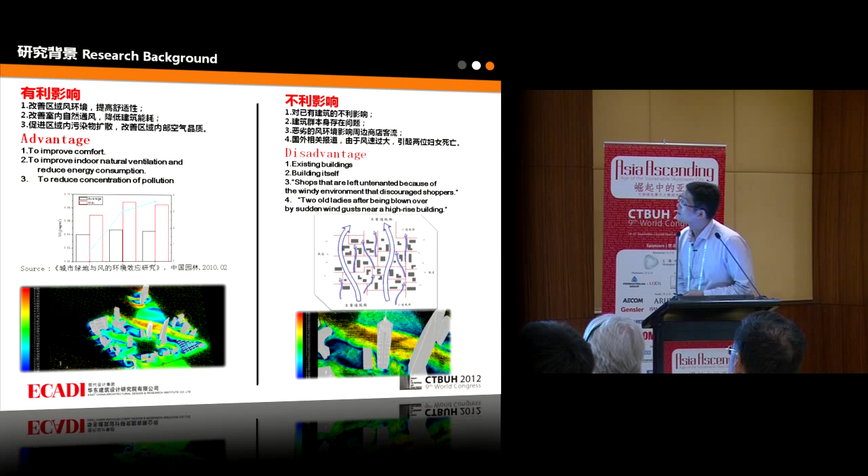So would it be in coordination or in harmony with the other buildings? In line with the literature, sometimes it will also affect the flow of neighboring shops, sometimes causing a decrease in visitor flow, and sometimes we also had casualties because of high velocity winds. So we hope that we can do some research.

I cited them from the internet. First, we have two methodologies: numerical simulation, and wind tunnel testing.

A couple of days ago, I also attended a workshop on the wind tunnel, because this is research based on the structure. If we use this wind tunnel method, it is quite expensive. But for numerical simulation, it also has some problems, like the reliability of the results. So it is kind of a contradiction.

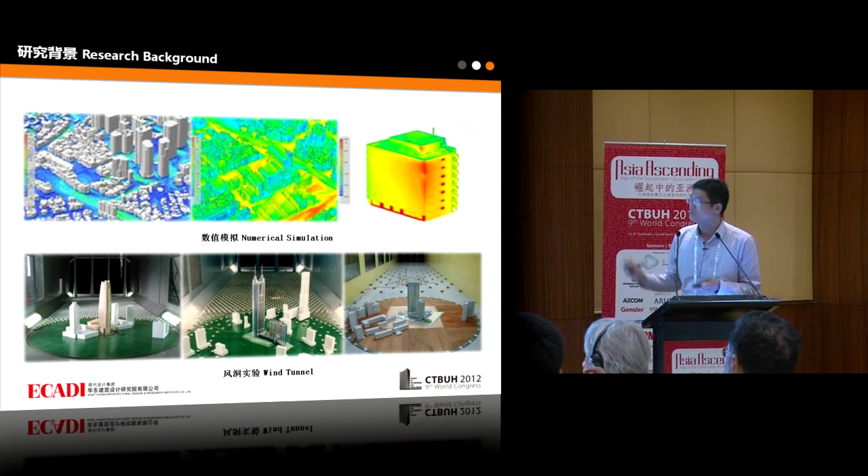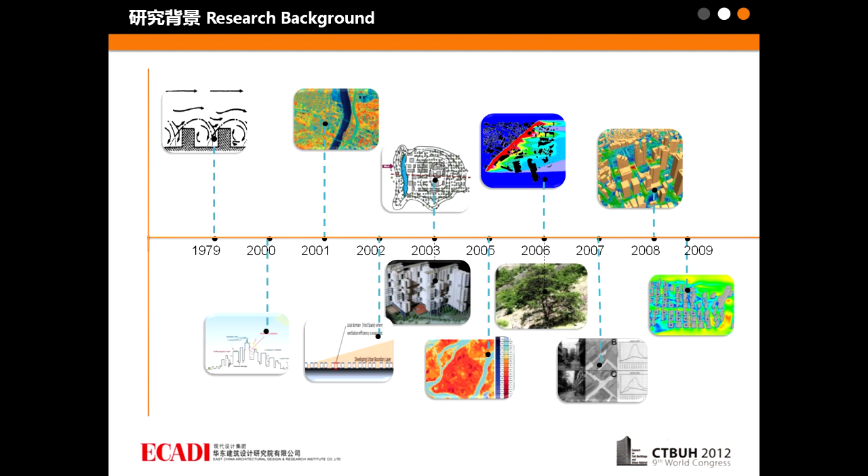Let's look at this slide. In recent years, ever since numerical simulation started from 1979, at that time computers were not quite mature. They have calculations based on mesh or grids. They were doing research based on one single building.

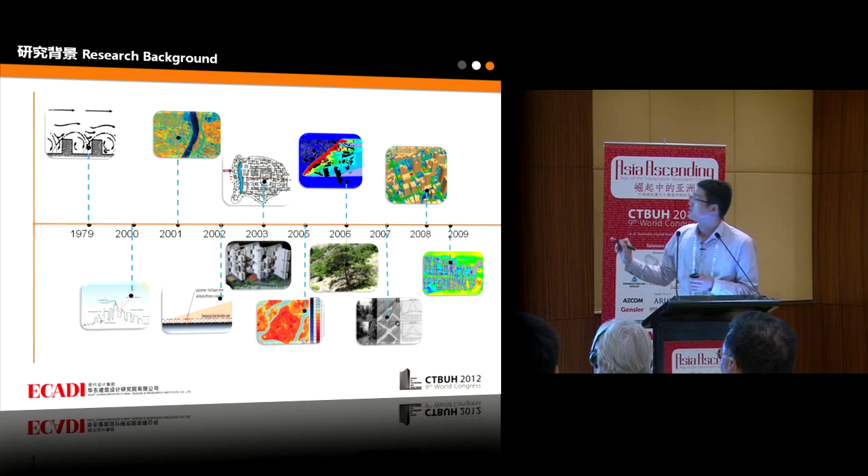So with urban sprawl and urban planning and requirements for comfort, we now have large-sized or middle-sized simulation. This is the development.

Secondly, I will talk about the basic theory. It's kind of a lengthy part, because in our research we found that for those larger-sized simulations, we also encountered some problems. That's why I want to go into the details first, because for the simulation we have two guidelines.

First, in Japan they proposed this guideline, and one in Europe, COST C14, and the other from Japan, AIJ. They have some similarities and also some differences. For the Japanese perspective, it is somewhat different.

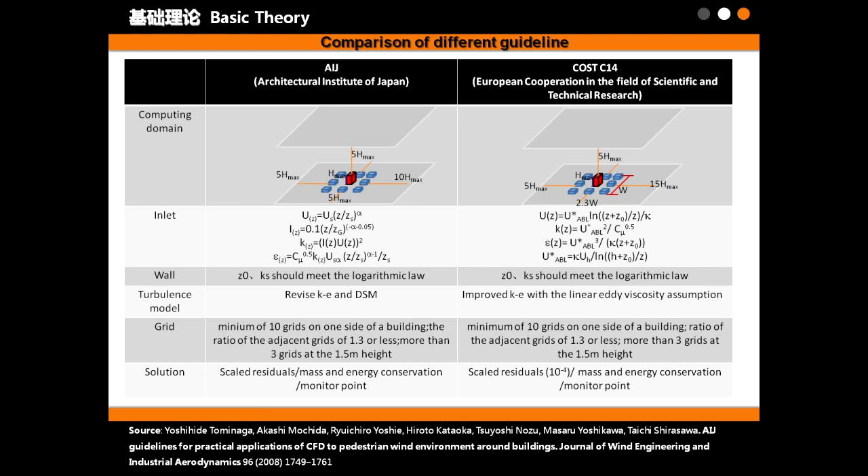In terms of the inlet, they are based on the height of the buildings, and for the outlet, Japan proposed 10 times, and for Europe, 15 times, so that they can try to avoid those impacts from the outlet.

As for the inlet boundary requirements, the Japanese side proposed this equation, and for the European side, they have the other equation.

As for the turbulence model, they're also different for the Japanese perspective and also for COST C14. As for the grid, they're quite similar - a minimum of 10 grids on one side of the building, so that we want to have a more accurate calculation.

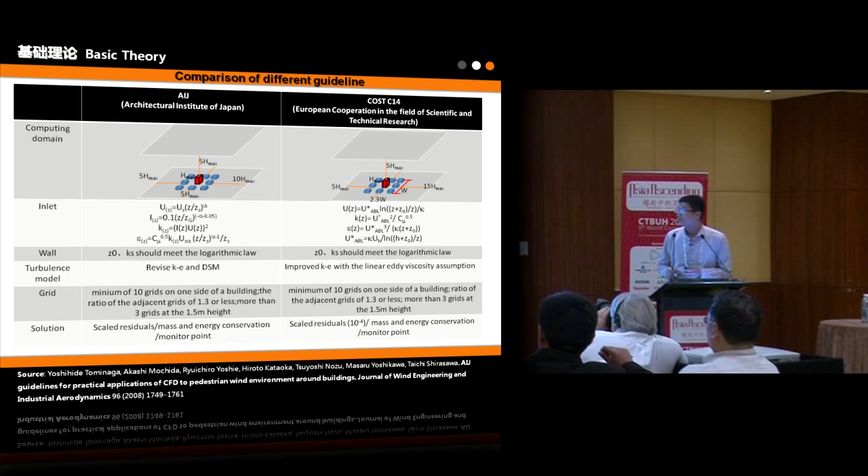We cannot just base it on that. We also try to look at physical reliability, velocity, temperature, etc., for the convergence of results.

First, what will be the mindset for our research? As I said, wind tunnel testing is quite a reliable method. However, it's quite expensive and time-consuming. If we can use numerical simulation, what will be the problems? Is it still reliable and accurate?

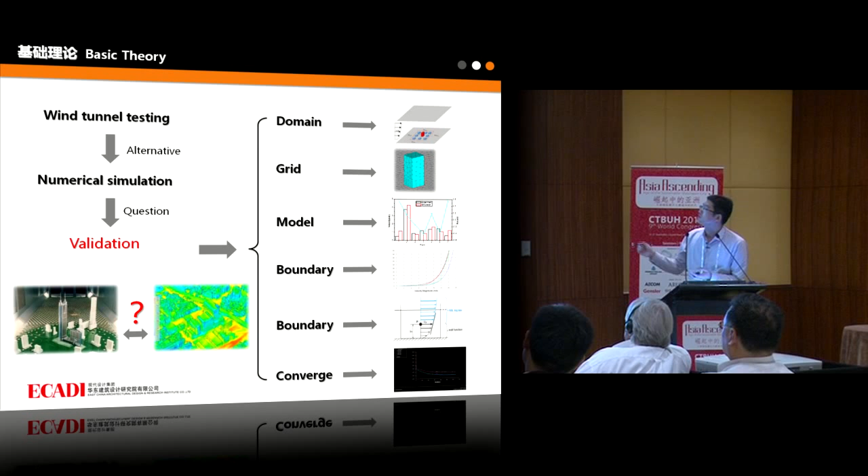Based on that, how can we do the simulation, how can we distribute the grids, how can we select the model, and how can we validate the accuracy of the grid, and the impact of the boundary and the inlet, and also the judgment for convergence, etc.

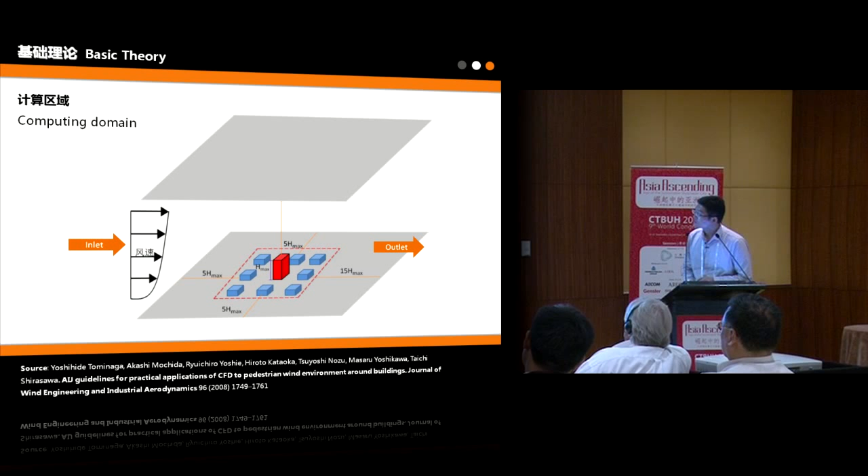Based on the aforementioned methodologies, this is based on the Japanese methodology. We will try to follow the requirements, but we are not blindly copying that model. We have to take into account the accuracy of the computer, so we will make some slight adjustments.

Secondly, the grid solution. Grid is very important for the accuracy. After the modeling, we'll have the initial mesh, and then we'll try to refine the mesh at 1.5 height, at least 3 to 4 grids, and we will try to maintain 10 grids in the final mesh. We hope to increase the thickness, so we will have 3 calculations to validate the accuracy of the grid.

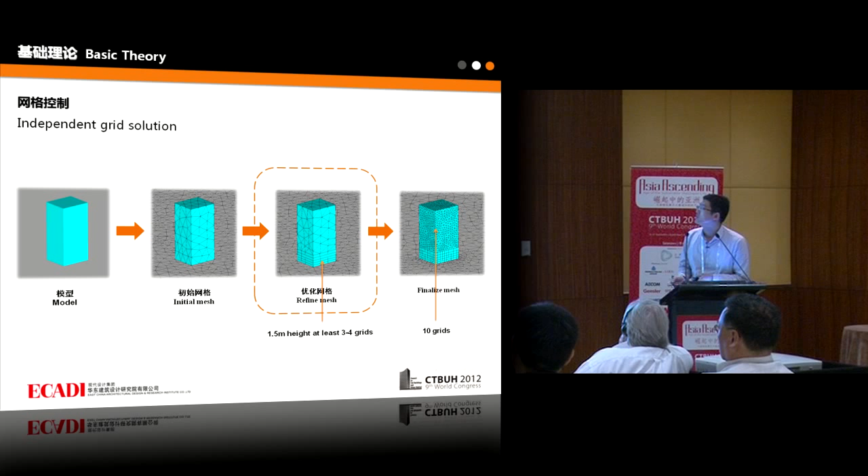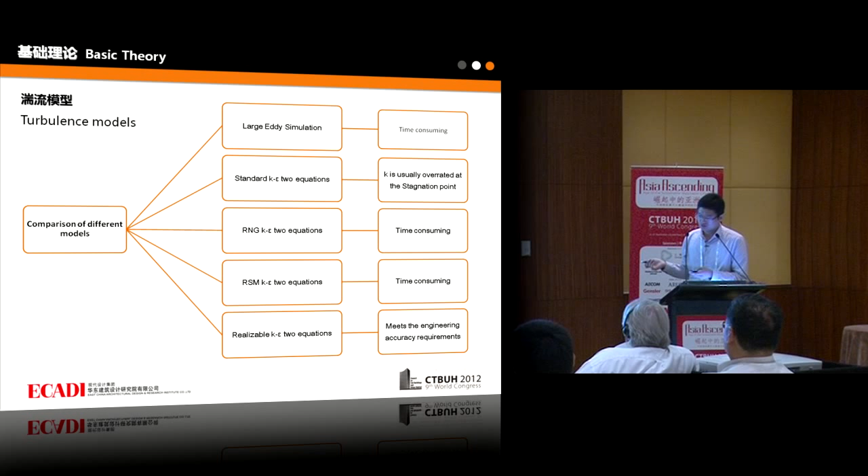This is the turbulence models. As we all know, for the turbulence models, they have the RNG standard equations and so on. In China and elsewhere, they hope to do the large eddy simulation, but for our regional simulation, it's not quite realistic, because it's time-consuming, and the bearing capacity of ordinary computers is not desirable. So we finally chose the realizable k-ε two equations. We want to explain this in the following content.

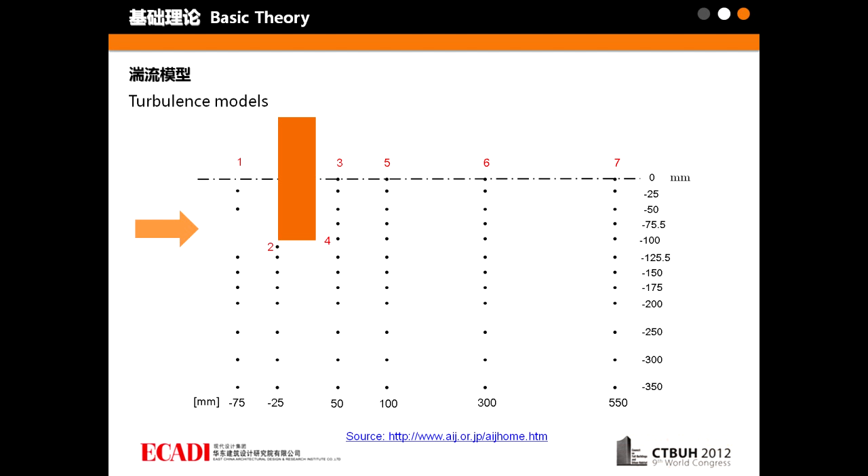In Japan, they conducted an experiment. We cited the results to validate the accuracy of the models. From left to right, this air flows, and they have those kinds of points for the monitoring and the calculation.

We used a standard k-ε equation with the first order upwind scheme. At the inlet and also downstream, those kinds of deviation reached 40 or even 60%.

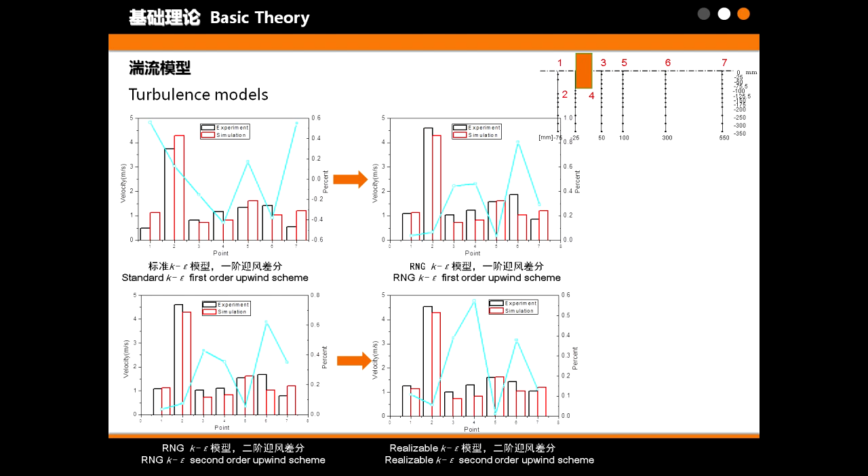Secondly, we have the RNG k-ε equation, also with the first order upwind scheme. Even though it is better, still after the downstream, the deviation is still a little bigger. The black results are from the experiment. If we use a second order upwind scheme, the results are better, but there's still some deviation.

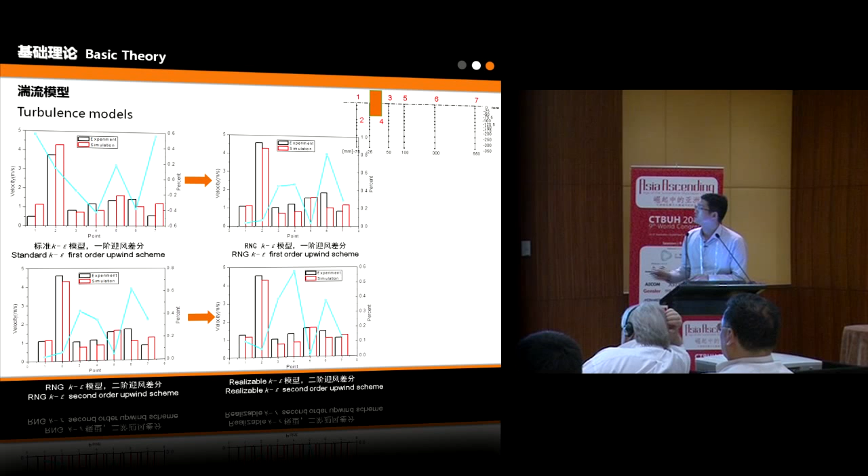If we use a realizable k-ε equation and the second order upwind scheme, after comparing the inlet and the downstream, they can meet the engineering requirements. That's why we selected that model for our simulation.

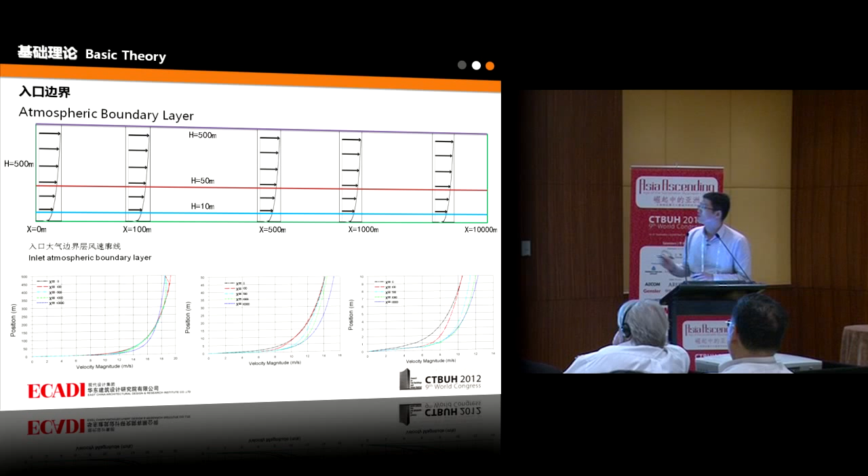Deformation is quite apparent. Why does it have this severe deformation? The inlet wind velocity has deformed until the downstream. We're paying attention to the 1.5 meter height, and it has great deformation at 10 meters high, which will greatly affect our results. How can we solve that? I will go into the details.

Now let's talk about the wall functions, in CFX, Fluent, and so on. They also have those figures or values; sometimes it reaches 10 meters, 20 meters. If we use a wall function, it might have this kind of contradiction. As for the Japanese and European standards, they have 3 to 4 grids at the height of 1.5 meters.

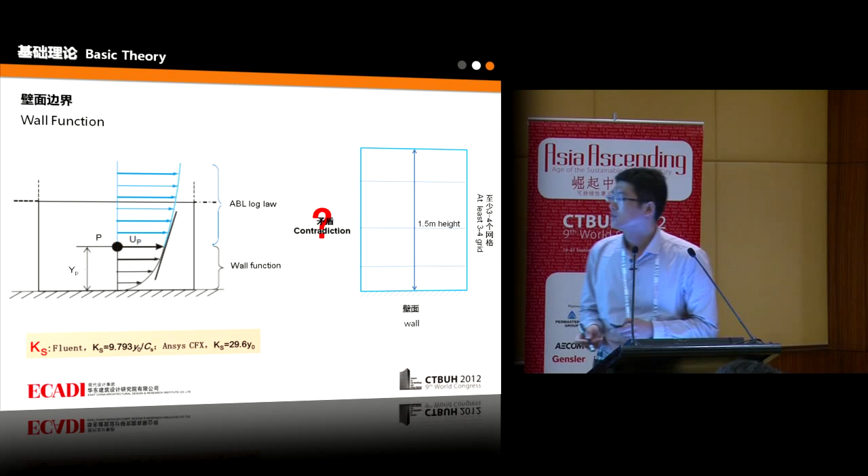So this is a contradiction, and this is a challenge for us. In all the commercial software, they also have such kind of problem. And how can we define the boundary? This is our principle.

Based on the existing literature, we can divide it into 3 areas: the upstream region, the core region, and the downstream region. Secondly, we'll try to reduce the upstream lines as much as possible, so that we maintain the same inlet velocity. In the core region, we'll try to have thicker grids so we reduce the number of grids and save time.

And then let's talk about the tree model. In our case, this is also one of our research results. As for tree models, internationally they have a lot of different methods to treat it.

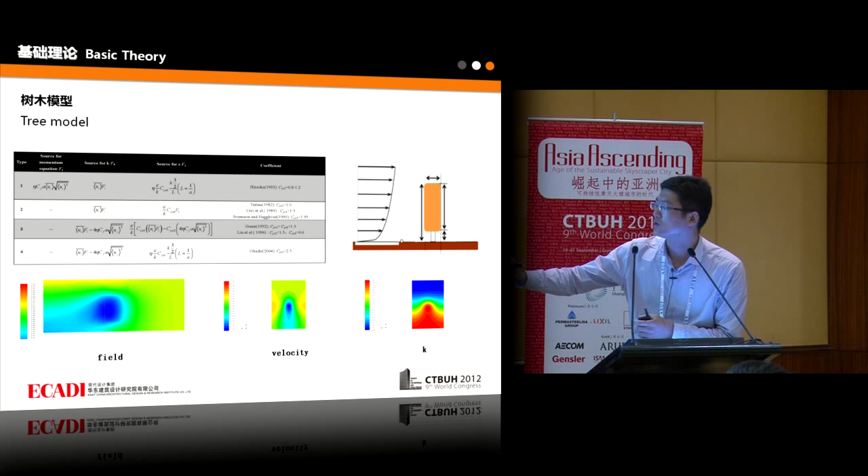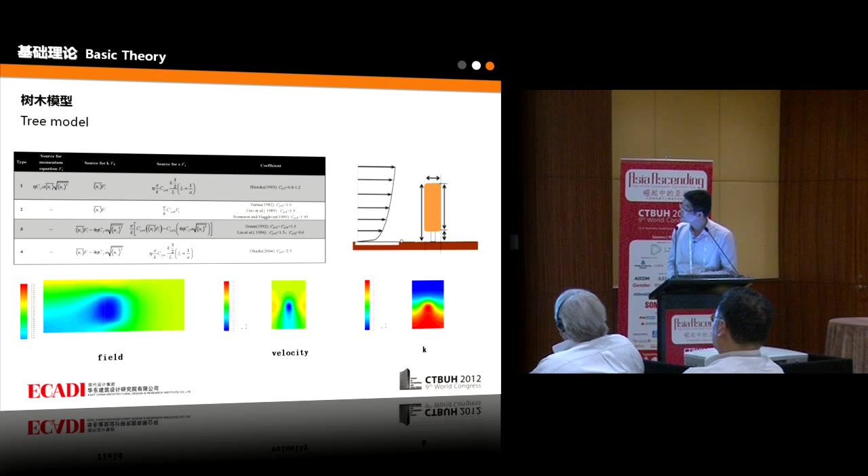And we've done some simple tests. We can see that with the trees, the overall field will be impacted, and when the airflow goes through the tree, the velocity reduction will be very obvious, and also this K has a bigger influence because of the tree interaction. The influence will be big. So this is the basic theory.

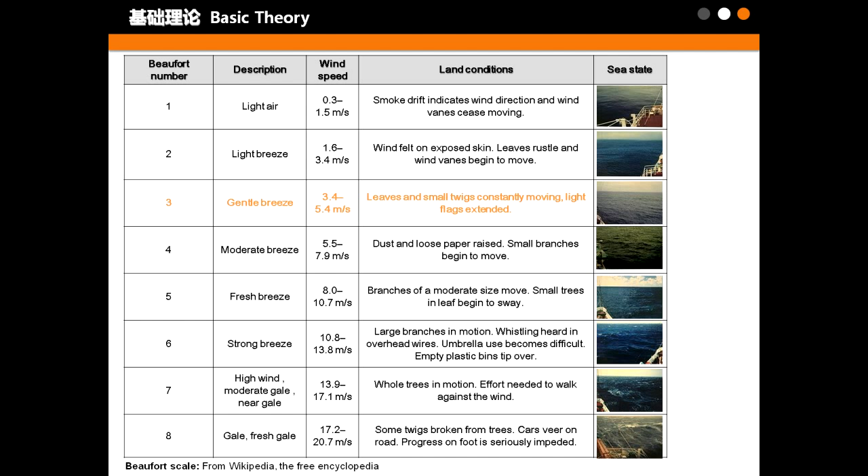Since we already have the calculation models, now we still need a standard to evaluate. This is the outdoor data evaluation standard, a very classic standard, and this is our table that we concluded. So 1.5 meter high and 5 meters per second, an outdoor situation which can reach the human being comfort level.

Here I would like to introduce you a case study. Our colleagues of SOM are also introducing such cases. This is the location of our project, which is located in Tianjin City. This is the Haihe River, and this is the project location.

In 2009, in the APEC meeting, this is the low carbon model city. Therefore, it has model significance, and we've done some study on it. This photo was provided by SOM, and you can see the overall area has a high rise and a super high rise, and this one is above 600 meters.

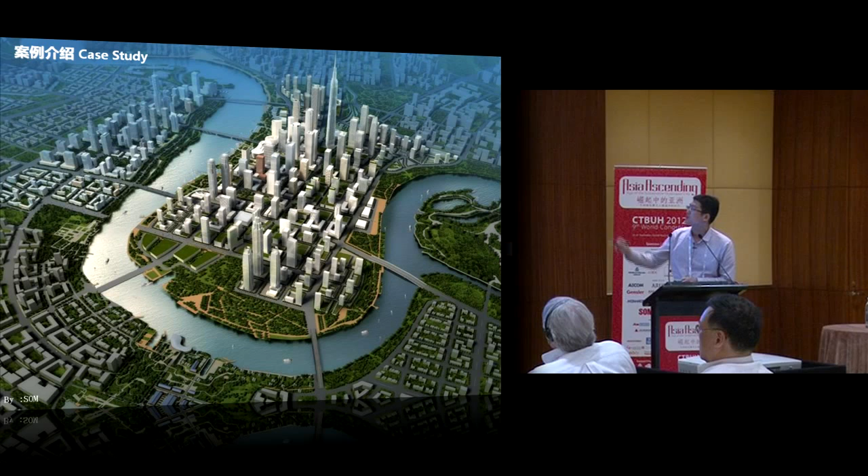And apart from this super high rise, there are also some green areas over there. A lot of the buildings over there are being constructed already. This is the plan for our master planning. The green areas are shown in green.

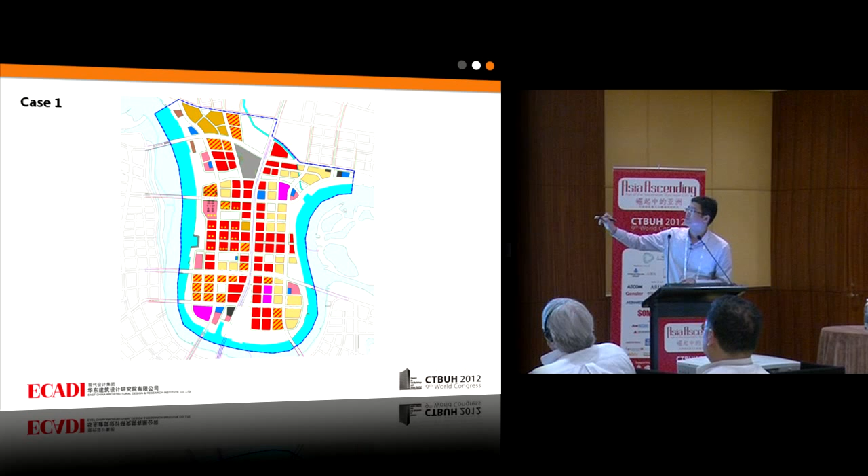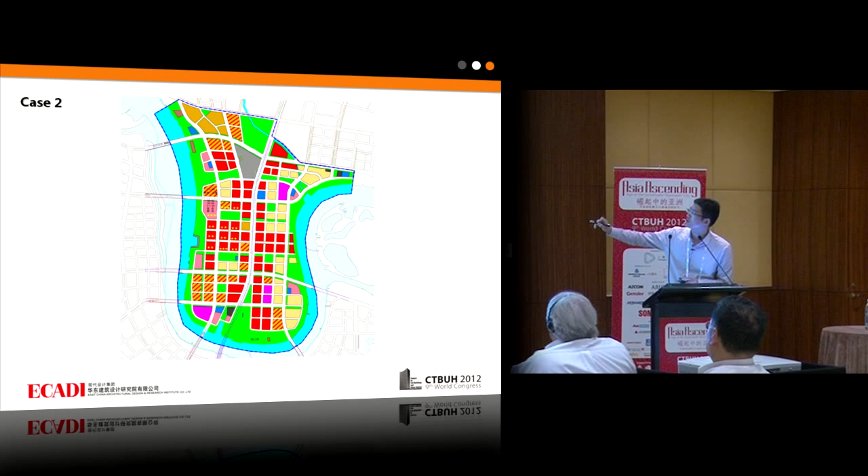You can see this green area includes lawn and some low-level plants, and also some trees, etc. They all have some influence on the airflow. The first case is if we suppose there is no green area, what is the situation? The second case is according to our current plan with the green area, what is the situation? And the last case, in some areas we will add some trees, and then what will be the situation for the airflow?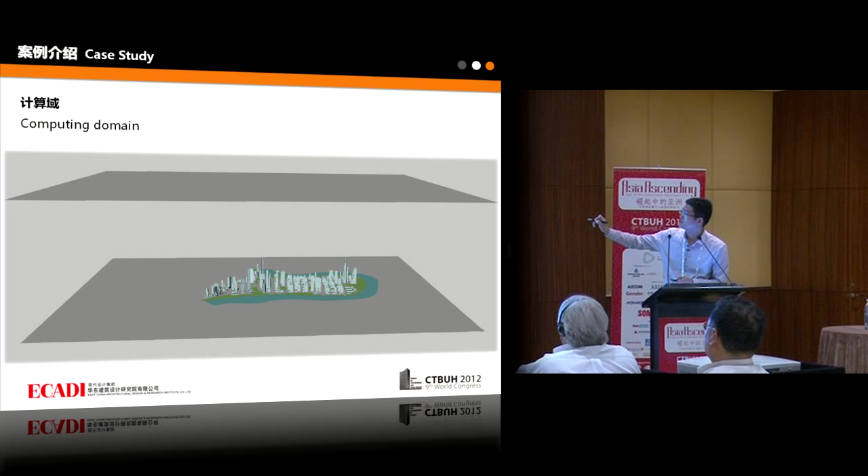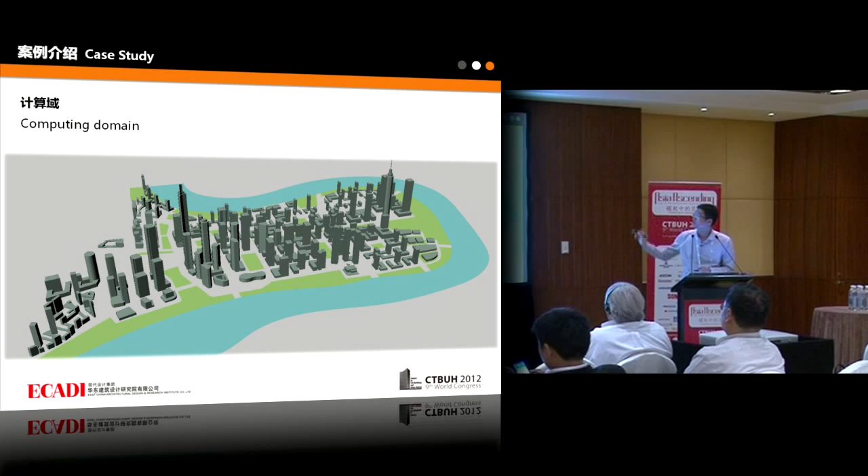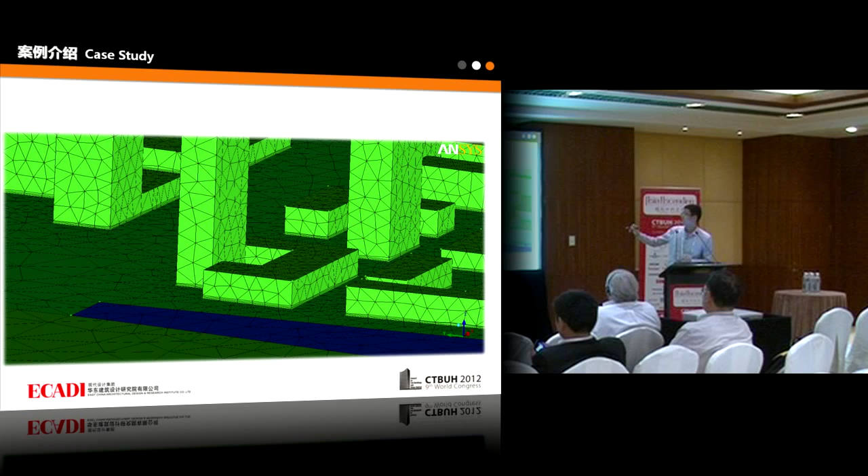So first, let's look at the computing domain. This is the area we have selected for calculation. This is our computing domain. These are some of the details we've already made in the plan. This is our overall grid. This is the local grid. In order to enhance the people's comfort level and calculate accurately, we've drawn 3 to 4 grids.

And these are the 3 different cases, and airflow changes in this vector graph. You don't see big differences. Let's look at this cloud graph.

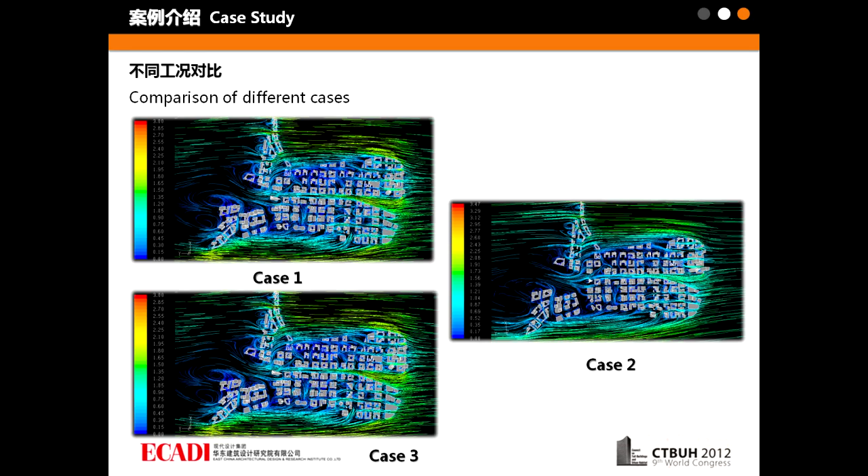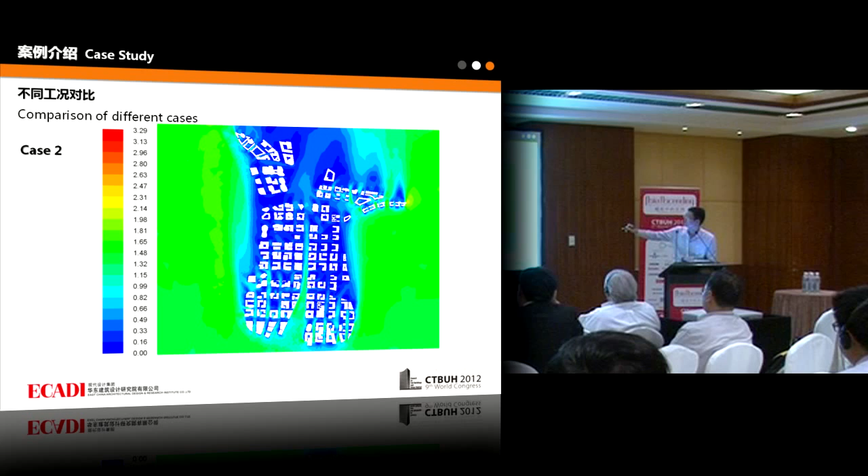This is the second case. In this cloud graph, you can see that there are big differences in the speed or velocity. The color is darker here, and here it is lighter. So you can see there are some differences with or without the green, especially on the 2 banks of the river. When you add the tree, the airflow obviously reduces.

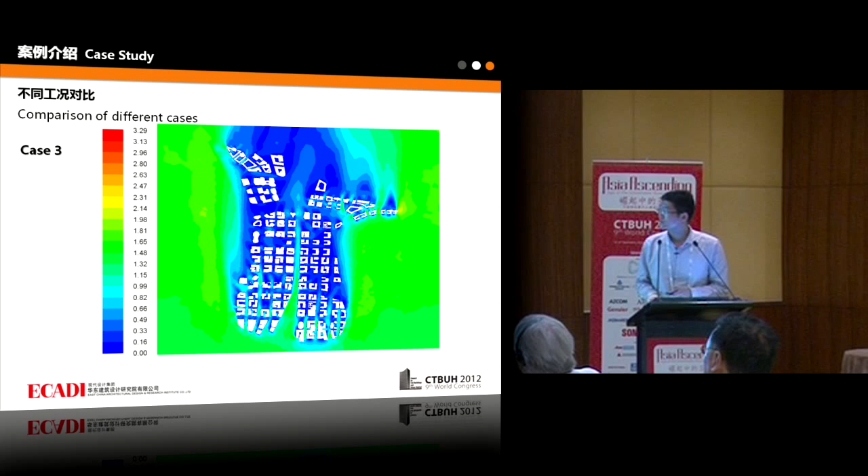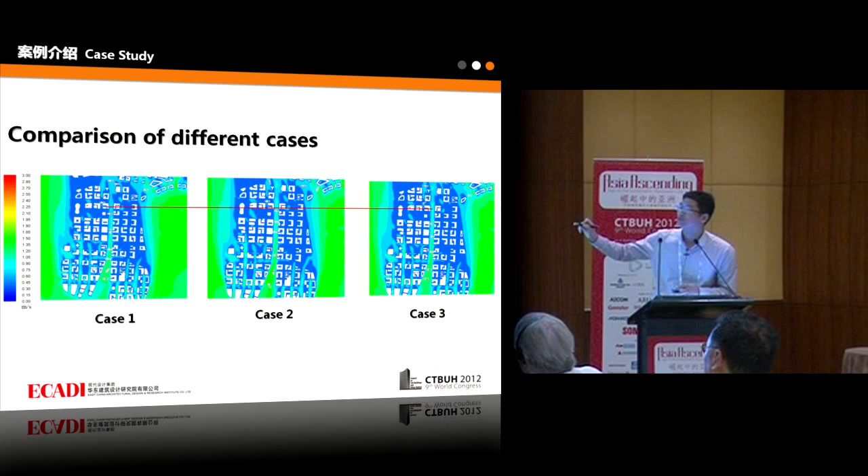There you can see that tree planting and green area adding has a very obvious influence. And because of PPT reasons, I did not clarify the figures very clearly here. They have a very big difference actually in these 3 testing points.

And lastly, I want to give you a conclusion. We have compared the cases, and we found that greening design strategy can improve air distribution and decrease eddy regions. And green planting planning can enlarge the uncomfortable area, especially in summertime. Also, it is difficult for pollution to disperse around the buildings because of the low velocity.

We found that case 3 is the best solution for outdoor air distribution because of changing the green planting area. It is recommended that low vegetation, grass, and trees should be planted in prevailing wind direction and densely built-up areas. This greening strategy will be good for air distribution as well as pollution dilution.

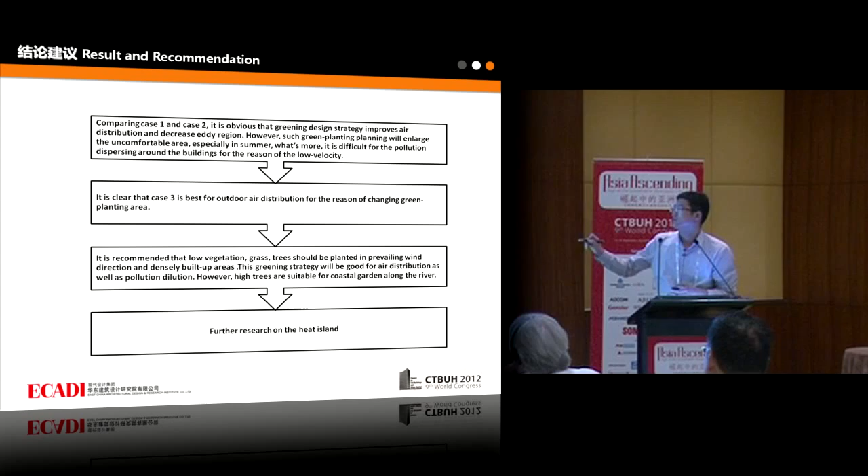Right now, we are also doing some studies on the heat island, and this kind of work has already started. We also consider the heat convey issues, and when we add this influence, the requirement will be higher. Right now, we don't have a good verification method. We've done a lot of on-site experiments and model simulation to study the heat island effect.

We already have the plan. We want to change the architecture type or shape to optimize the outdoor environment. But for now we use a simple method such as adding more green areas to optimize the outdoor environment.